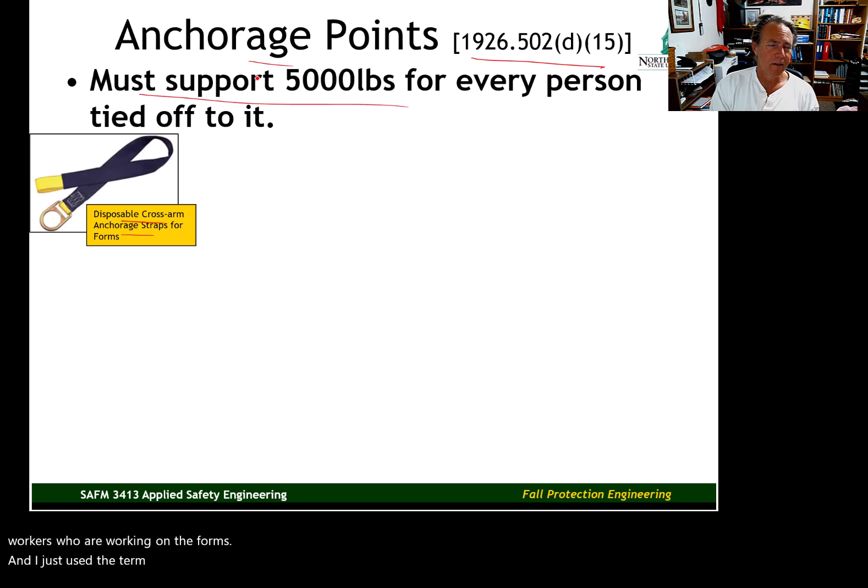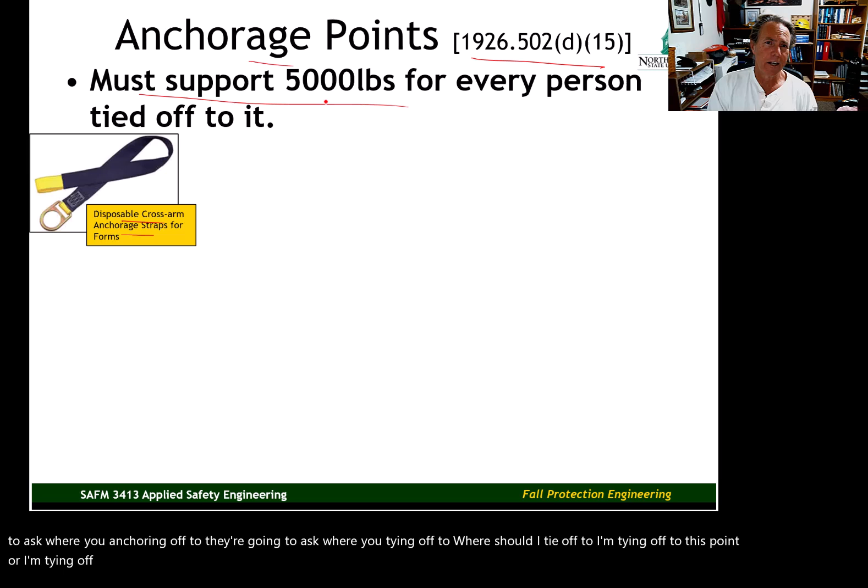You'll hear workers aren't going to say, well, I've got a great anchorage point over here. Or you're going to hear one worker ask another, they're not going to ask, where are you anchoring off to? They're going to ask, where are you tying off to? Where should I tie off to? I'm tying off to this point, or I'm tying off to that point. Anchorage points in the field are normally going to be referred to as tie-off points.

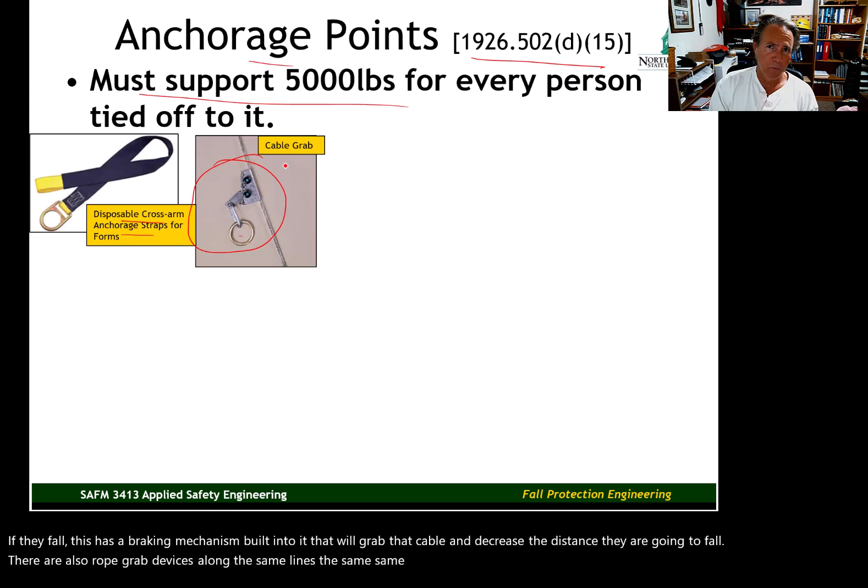This is a type of tie-off or anchorage point that is designed to be used with a device called a cable grab or a vertical lifeline. A vertical lifeline is a vertical cable that will have a device like this attached to it. The worker will attach their lanyard to this ring. If they fall, this has a braking mechanism built into it that will grab that cable and decrease the distance they are going to fall. There are also rope grab devices along the same lines, the same rationale. A rope grab, cable grab, same types of devices, just slightly different pieces of equipment, slightly different materials.

This is a permanent anchorage point that might be epoxied into a concrete surface or other structurally sound surface. Again, it has to be structurally sound. If you attach this to something that's not built correctly, it's not going to support the weight of the worker. And again, must support 5,000 pounds for every person tied off to it.

This is a cross-arm cable, not disposable. It's like the disposable cross-arm strap we have over here, but it's a cross-arm strap made out of wire rope material. You throw this over a beam. Again, the beam has to be structurally stable. If the beam's structurally stable, you throw this over that beam, choke it to that beam, and the worker's going to connect their lanyard right here.

This is a reusable concrete anchor. You drill a hole into concrete, and that hole provides a compression fitting with this device. They put this device into that hole. Once it's into the hole securely, it can't be pulled from that hole easily. It does provide the required anchorage support. Use these a lot in a lot of different construction projects. They're nice because they are reusable.

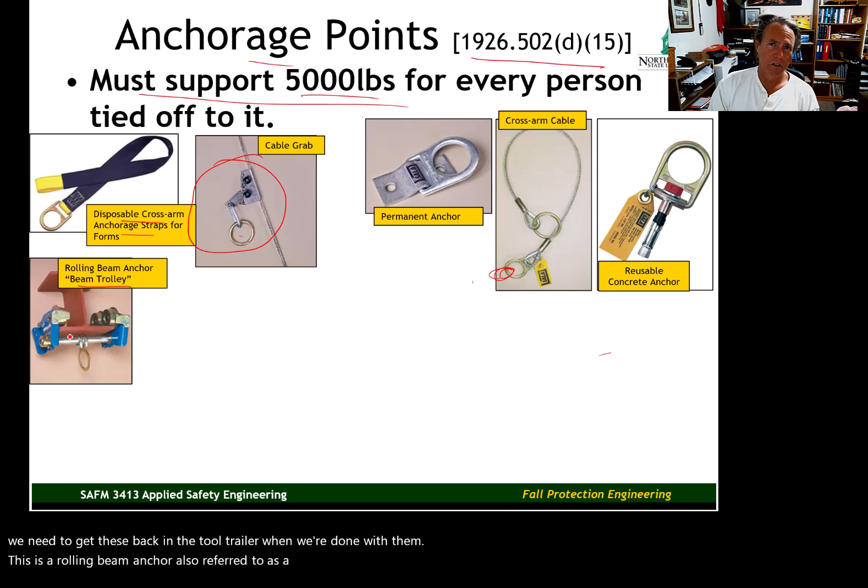This is a rolling beam anchor, also referred to as a beam trolley. You'll see a lot of these devices in ironwork. If you have a worker walking on a girder or a beam, they're walking here. Let's say this is their walking surface, and there's another beam above. The beam trolley will go on the beam above them, and the worker will connect to that ring right there. It rolls back and forth on the girder and allows pretty good range of movement for the worker.

Handy little device. Again, not cheap. I have in my collection of fall protection gear a similar device that doesn't have the rollers on it, but it functions the same way.

This is an anchorage cart device designed for one person to tie off to. Now with this, you don't have to drill any holes. You don't have to fill it with water. But when you lay down these outriggers on a flat surface, like a concrete surface, it forms a connection to that surface, and these outriggers especially keep it from sliding and moving. It's got pretty good weight to it. The weight of the device, along with these outriggers that grab onto the surface that it's sitting on, will provide anchorage for one worker. And the worker will hook their lanyard to that ring right there.

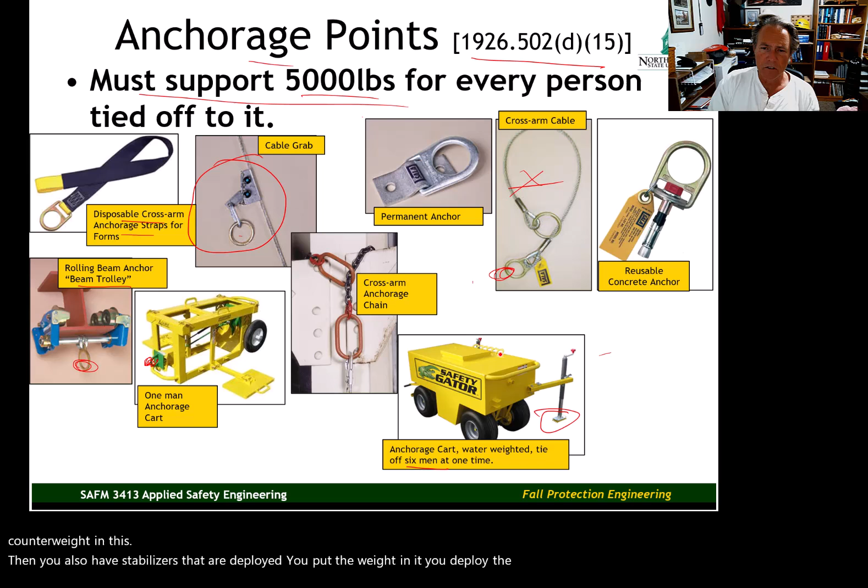Here's a cross-arm strap made with chain, similar to this cross-arm strap, same concept. Here is a 6-person anchorage cart. Now this one is different. You put water or sand, you put weight in this, you put counterweight in this. Then you also have stabilizers that are deployed. You put the weight in it, you deploy the stabilizers, and you see 1, 2, 3, 4, 5, 6 rings that workers can tie back to.

We use both of these devices a lot in bridge work, because once you pour your bridge deck, the owner doesn't want you drilling holes in the bridge deck. But you have to have something to tie off to in some instances. So we would use carts like this to provide tie-off points to the workers.

And another cross-arm strap. And this is a good picture here because it shows how the strap is choked around the beam and providing the tie-off point for the worker's lanyard. And I could do 30 minutes just talking about all the different possible devices that are out there. There's tons of devices available. And going back to my point I've made a couple of times now, there's never an excuse for not having a tie-off point, not having fall protection for your workers.

And I've mentioned this, but let me reiterate. Whatever we're using our cross-arm straps with, or let's say we're using a permanent anchor, we need to make sure that what the permanent anchor or the cross-arm strap is attached to has the structural integrity necessary to support the worker in the case of a fall.

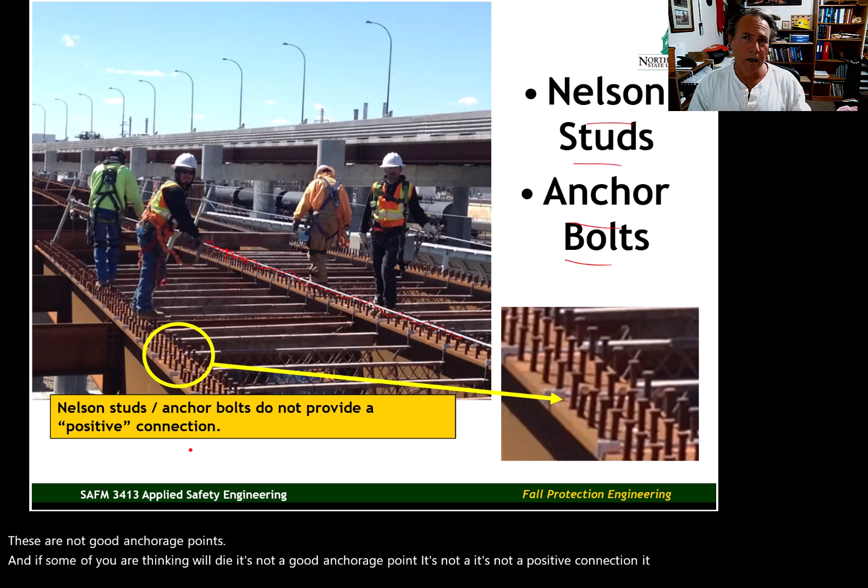These are not good anchorage points. And if some of you are thinking, well, duh, it's not a good anchorage point. It doesn't provide a positive connection. But the reason I mention this is because workers do try to use these Nelson studs as anchor points.

When I was with Manhattan Construction, it was outside of my region, out of the Oklahoma City region, but a worker tried to connect to the Nelson stud and use it as an anchorage point. Had his harness on, he had his lanyard, and he was going to use this as the anchorage point. That was fine until he fell. When he fell, the rebar hook on his lanyard popped right off the Nelson stud, and he fell 30 feet.

The upside of that whole incident, workers learned immediately that you can't use a Nelson stud as an anchorage point, as a tie-off. And the other upside, the worker survived. Even though he fell on rocks below, he walked away from that incident with only a broken arm. And there's more to that story with that worker. He did survive the fall.

If anybody wants to hear the rest of the story about that particular worker, I'd be more than happy to share it with you. But again, I do want to try to keep this particular video within 50 minutes.

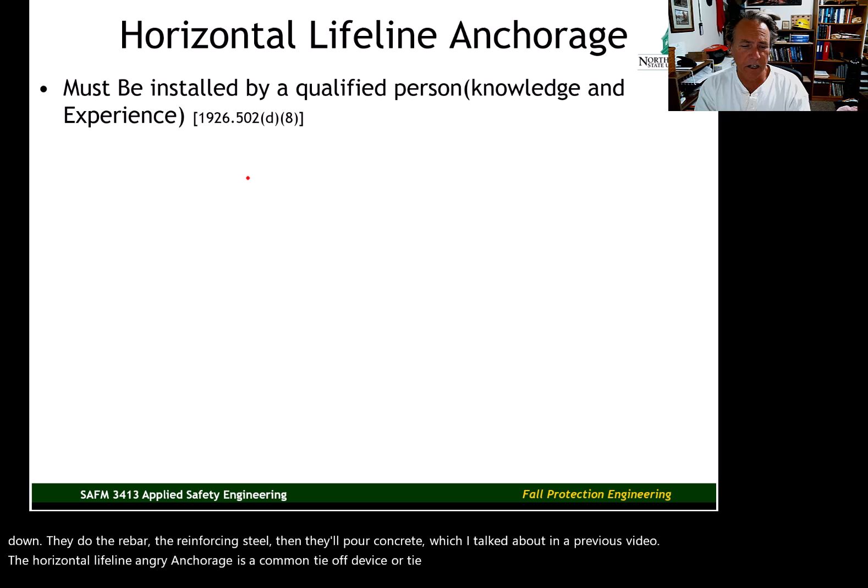The horizontal lifeline anchorage is a common tie-off device or tie-off point that you'll see in a lot of different work environments. It is exactly what it says it is. It's a horizontal line that is structurally secured at each end. It will have intermediate posts that will help maintain the proper elevation of the line. If it's set up correctly, it provides an excellent tie-off point and allows good worker movement. They're not too constrained when they're tied off to the horizontal lifeline.

But it must be installed by a qualified person who has knowledge and experience. They know what they're doing. I can't tell the new guy to go out and put up the horizontal lifeline. It has to be someone with the experience, knowledge, and skill necessary to do it right so that the anchorage is safe.

Must be installed according to design specifications. There should be a design. It shouldn't be, well, let's try this. We got all these poles, we got this cable, let's put this together. There should be plans showing how it goes together. And I'll give you an example of what we mean by plans on the next slide.

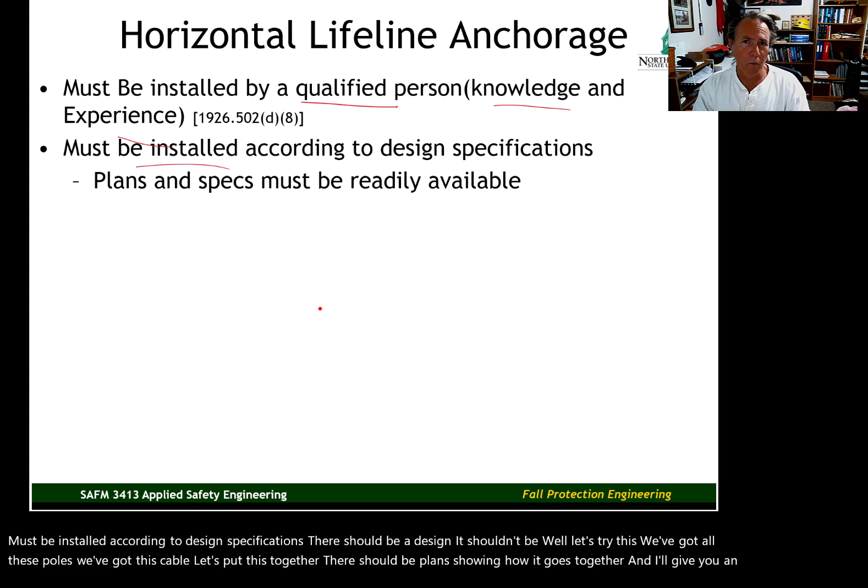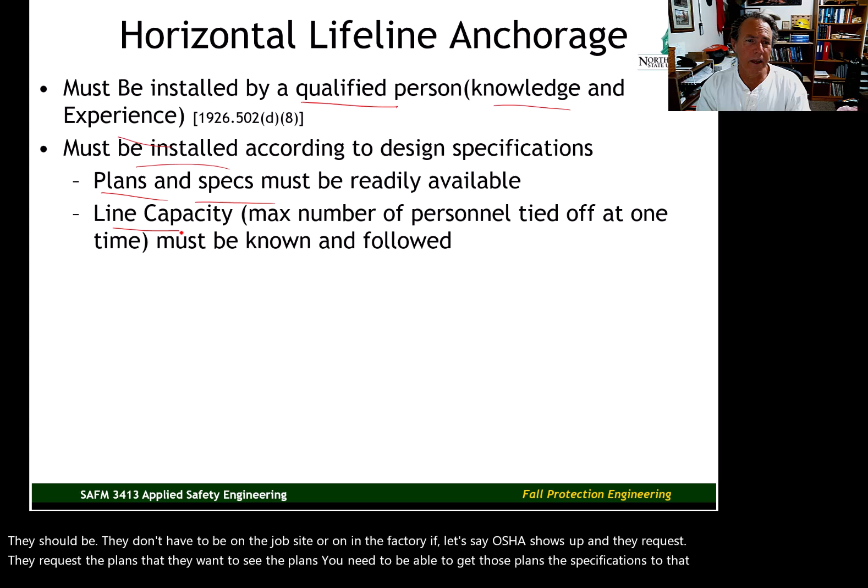The plans and specifications must be readily available. They don't have to be on the job site or in the factory. But if, let's say, OSHA shows up and they want to see the plans, you need to be able to get those plans, the specifications, to that inspector. The plan specifications must identify the line capacity, the maximum number of personnel that can be tied off to the line at one time.

Companies need to make sure that this line capacity is not exceeded. Another issue with installation of a horizontal lifeline is the amount of sag in the line. Common sense may cause us to think that the tighter the line, the better. That's not true. Your line needs to have a little bit of sag in it. That sag helps with shock absorption. If the line is as tight as possible, it doesn't provide any shock absorption.

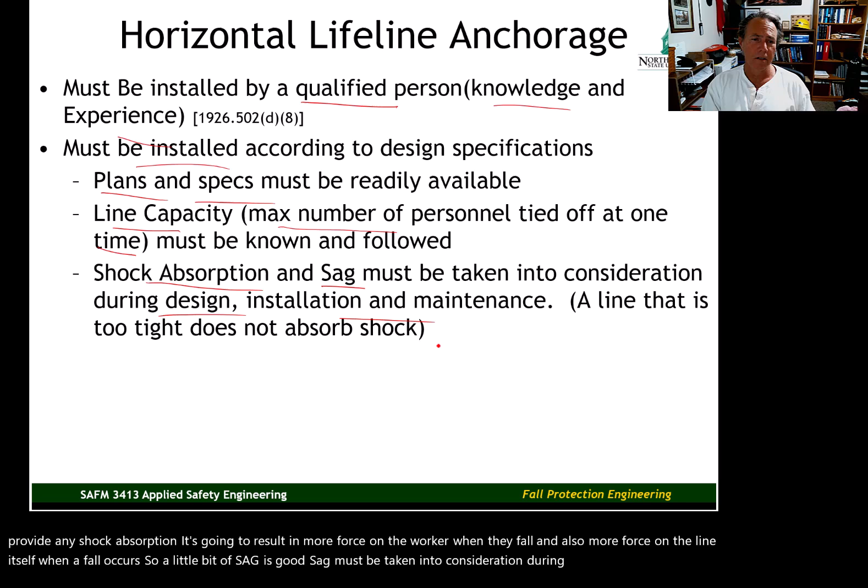It's going to result in more force on the worker when they fall, and also more force on the line itself when a fall occurs. So a little bit of sag is good. Sag must be taken into consideration during design, installation, and maintenance. If you are using wire rope clips at each end of the horizontal lifeline, you must use at least 3 wire rope clips. And I'll show you some pictures of what we mean by terminations and wire rope clips.

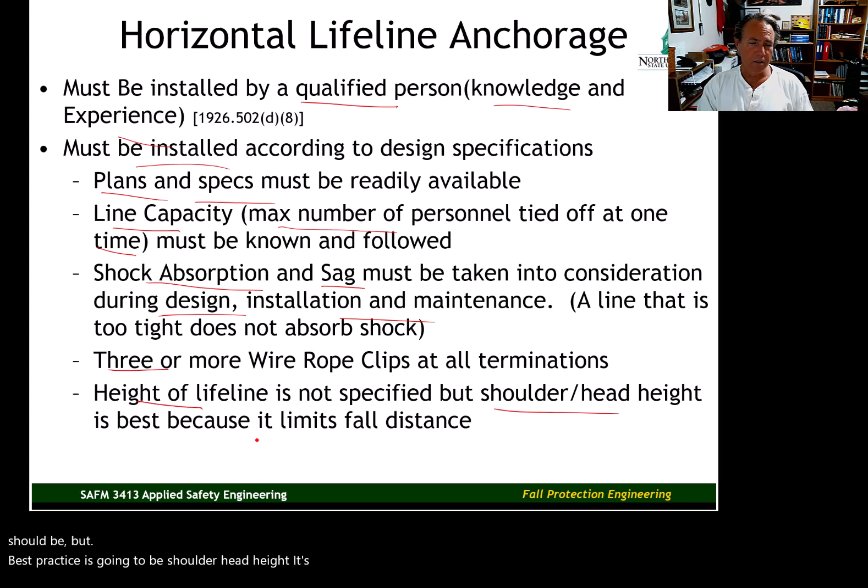We need to also consider the height of the lifeline. That's not specified anywhere in any of the ANSI requirements. It's not specified in OSHA as far as how high the line should be. But best practice is going to be shoulder or head height. It's going to limit fall distance if it's at shoulder or head height. It's also going to make it easier for workers to go from one side to the other. They're not going to have to step over it or crawl under it.

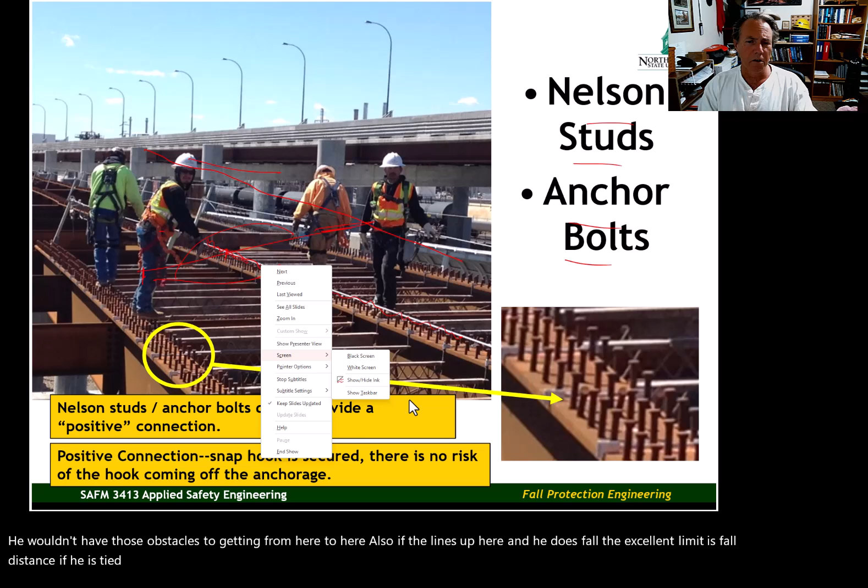Also, if the line's up here and he does fall, that's going to limit his fall distance. If he is tied off here and he falls, he's going to fall a couple of extra feet before that lifeline catches him. So height of lifeline needs to be taken into consideration. I prefer shoulder to head height, in that range. You do have to take into consideration the size of your average worker. If you put it too high, they're not going to be able to reach it.

And you do run into that with a lot of construction crews. Like I mentioned previously, construction workers typically are smaller. They're not the stereotypical big guy. They're small, wiry, hard workers, strong as an ox, but they're not big. And this is what we mean by the plans: having some written drawings, some plans for your horizontal lifeline. Now this is for a special type of horizontal lifeline that we used on pier caps at the company I worked for in the past.

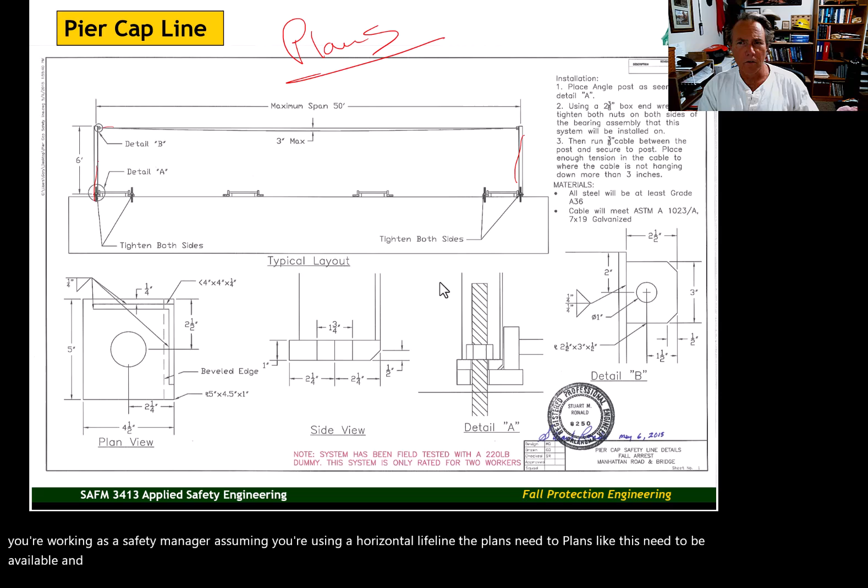And it shows the termination of the line at each end. And it shows a clear span of horizontal lifeline. And all this detail here shows how it's attached to the pier cap and so on. We don't need to go into those details, but when you're working as a safety manager, assuming you're using a horizontal lifeline, plans like this need to be available. And when the line's being installed, the plans need to be followed. And here are the installation instructions right here, all designed by our engineer.

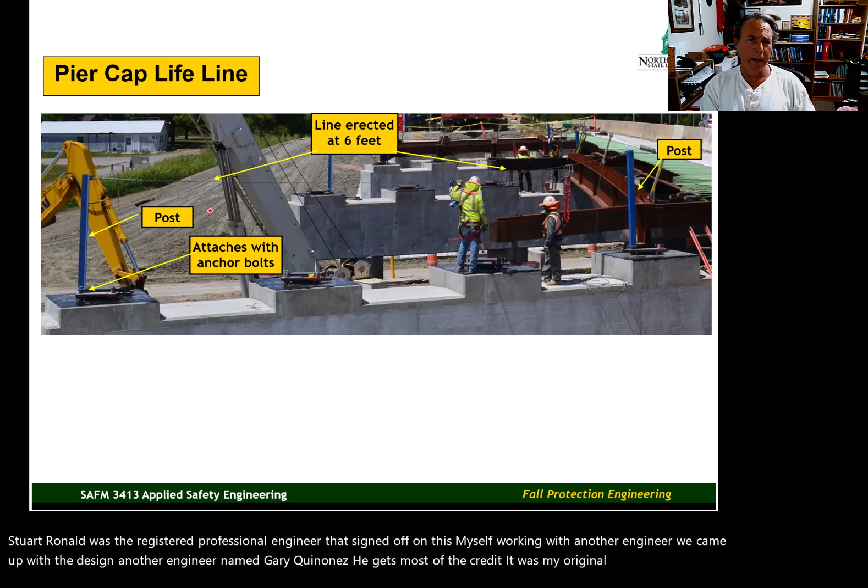Stuart Ronald was the registered professional engineer that signed off on this. Myself, working with another engineer named Gary, we came up with the design. He gets most of the credit. It was my original idea to have a line like this across the top of the pier cap. He did all the math. He did all the drawings. And then once he designed it, we tested it. We had a facility where we would test our lifelines, and it ended up being a great little system.

But you can see here, I don't remember this worker's name. Hard worker, great guy, love him to death. But he's a shorter guy, and you see how with the height of this line, his lanyards are just barely reaching up to it where he's standing. But if he falls, he's going to fall less than a foot, which is going to be good for him as far as the forces on his body. Notice he's using a twin leg lanyard. So is this gentleman here, a twin leg lanyard.

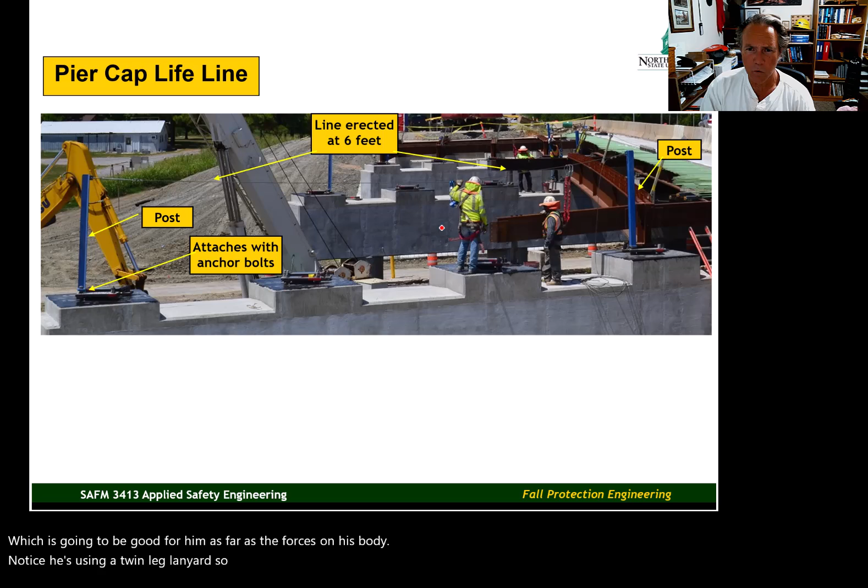Now here he's using a shock absorbing straight lanyard. This worker is using a twin leg retractable lanyard. But having the line up here reduces their fall distance. Before we developed this line, workers would tie off to a static line that was strung across the top of the pier cap. That increased their fall distance. It wasn't as good for the worker. It wasn't as safe for the worker.

Let's see, what else do I have here? Again, if you design in-house, engineers need to be involved. You need to test the system. You need to test the system according to the ANSI and OSHA protocols for testing horizontal lifelines. And the main consideration there is your test weight. You have to have a 220-pound test weight for testing these devices.

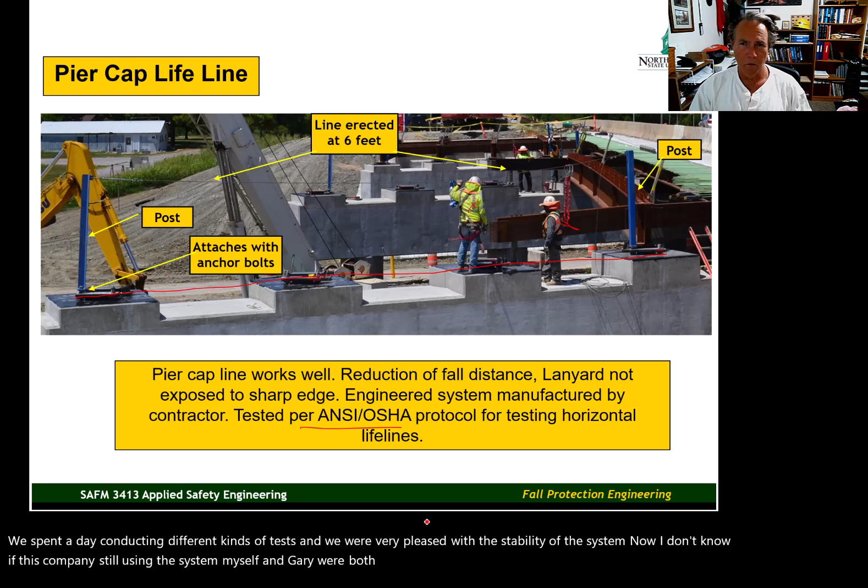And we were using load cells to determine the force generated by that 220-pound weight. We spent a day conducting different kinds of tests, and we were very pleased with the stability of the system. Now, I don't know if this company's still using the system. Myself and Gary were both gone. We were the big proponents of this. Wouldn't surprise me at all if they're not using it anymore. But it is a good system. Works, made it safer for the workers.

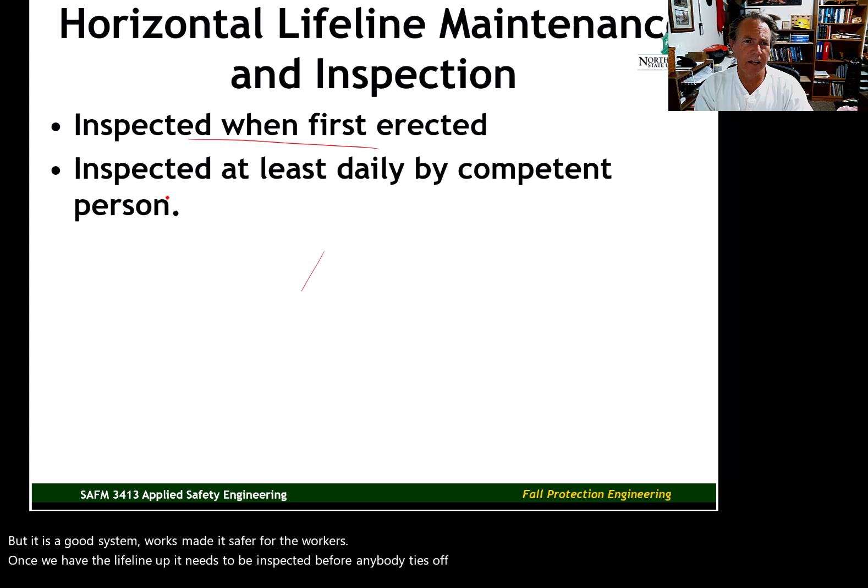Now, once we have the lifeline up, it needs to be inspected before anybody ties off to it, and then at least daily by a competent person. A competent person is a qualified person who has the authority to take corrective action. That is an OSHA term. Qualified, meaning they have the skills, the training, the knowledge to know what's safe and what's not safe, and they have the authority

to take corrective action. A competent person is a person who can say, this isn't right, everybody stop, we're going to fix it. If they don't have the authority to shut down the job, they're not a competent person. And that authority comes from the employer. The employer designates who the competent person is in different work environments.

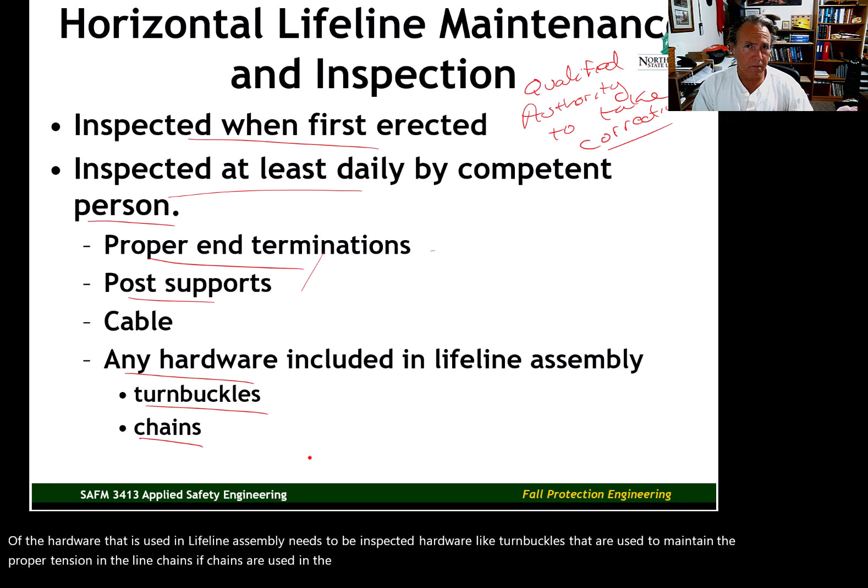Some things to look for in the inspections: proper end terminations, the post supports, the cable itself. The cable that we use, the wire rope that's used, can become frayed. It can become worn. Any of the hardware that is used in the lifeline assembly needs to be inspected. Hardware like turnbuckles that are used to maintain the proper tension in the line. Chains, if chains are used in the assembly installation of the system.

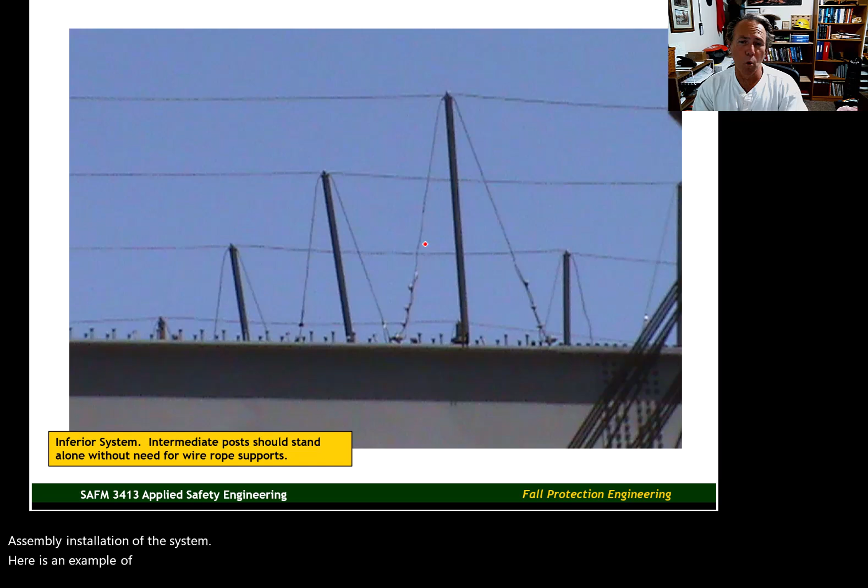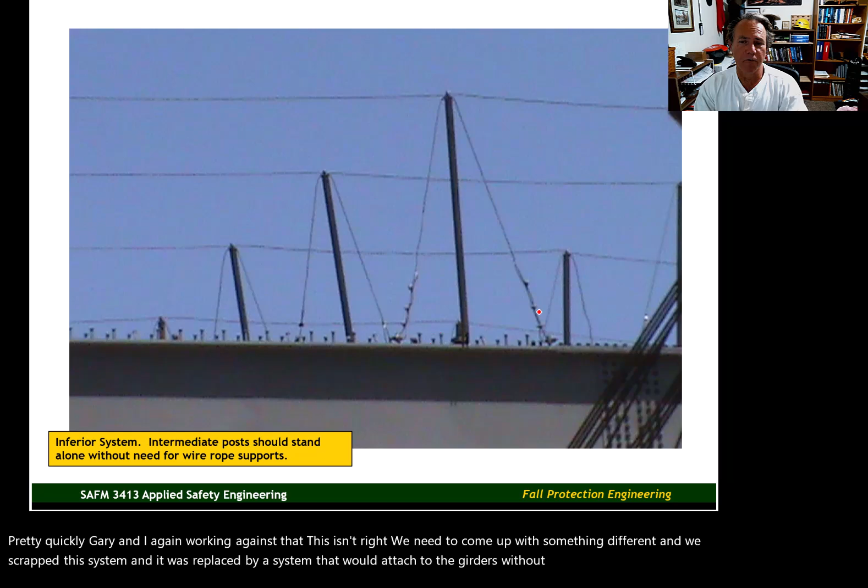Here is an example of a poor design and a poor installation. This design required support cables to hold the posts up. That's not a good design. It was scrapped pretty quickly. Gary and I, again, working together, said this isn't right. We need to come up with something different. And we scrapped this system, and it was replaced by a system that would attach to the girders without the need for the support cables.

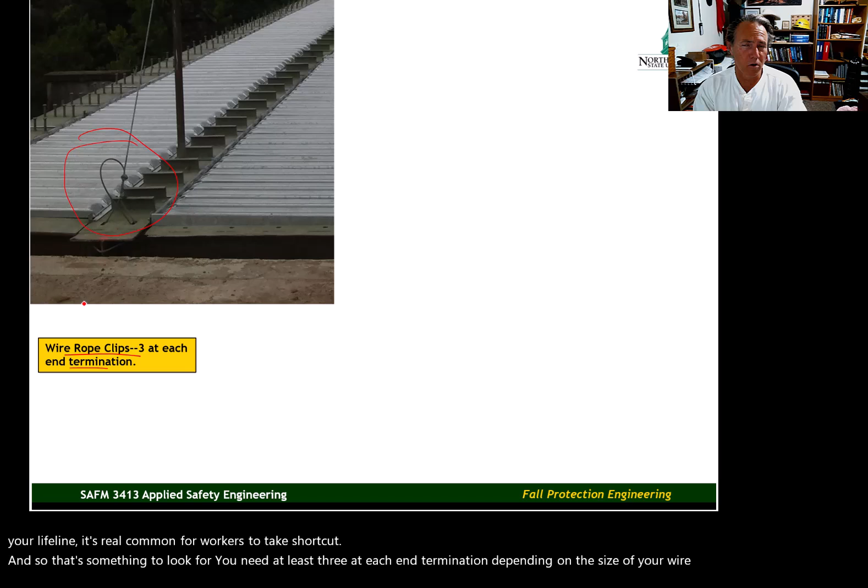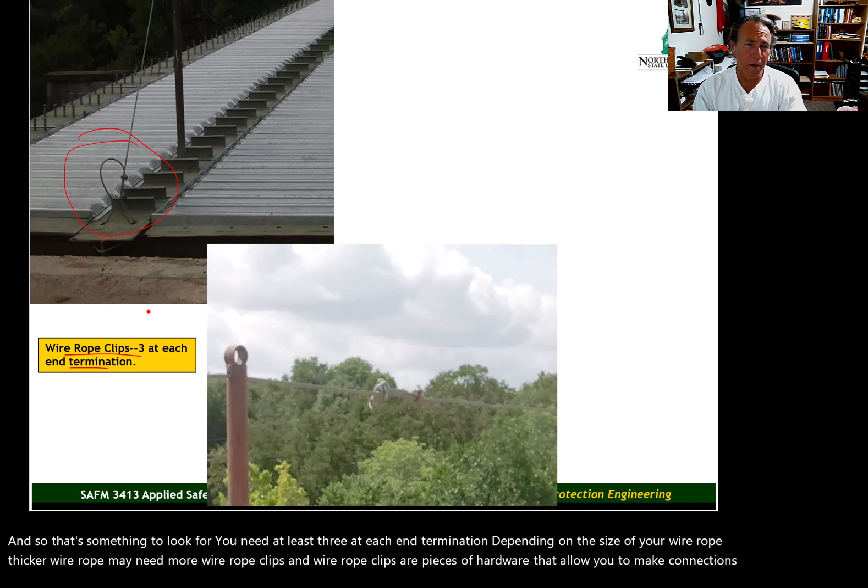Here is an end termination that only has one wire rope clip. Very common. If you're using wire rope clips to terminate your lifeline, it's real common for workers to take a shortcut. And so that's something to look for. You need at least 3 at each end termination. Depending on the size of your wire rope, thicker wire rope may need more wire rope clips. And wire rope clips are pieces of hardware that allow you to make connections between the wire rope and another structure or different sections of wire rope.

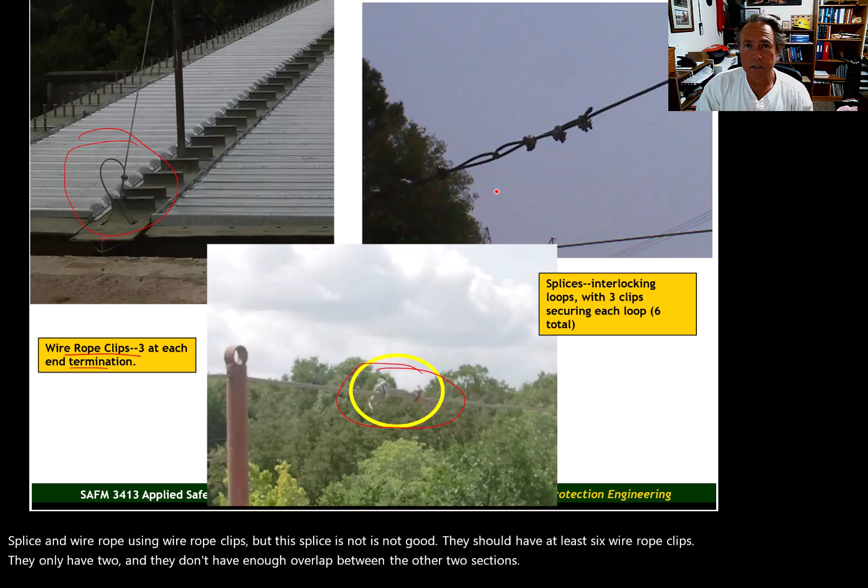Here we have a splice in wire rope using wire rope clips, but this splice is not good. They should have at least 6 wire rope clips. They only have 2. And they don't have enough overlap between the 2 sections. The better way to form a splice in wire rope is to create interlocking loops. We have an interlocking loop here with 3 wire rope clips, interlocking loop here with 3 wire rope clips. The interlock of the loops, that's much better than the splice.

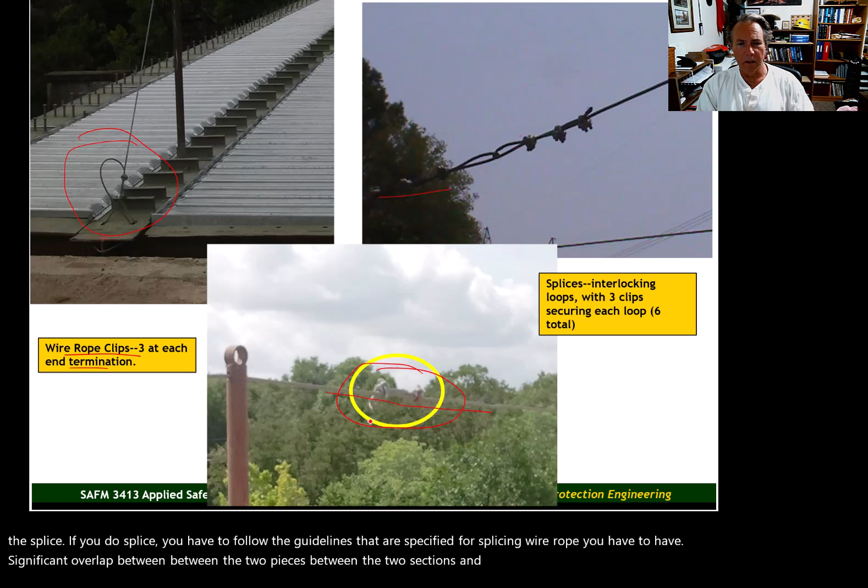If you do splice, you have to follow the guidelines that are specified for splicing wire rope. You have to have significant overlap between the 2 pieces, between the 2 sections, and you have to use the right number of wire rope clips. The minimum for an overlapping splice like this would be 6. It could be more depending on the splice itself and the characteristics of the wire rope. So pay attention to these issues if you're working around horizontal lifelines. Now, the better horizontal lifelines, they don't use wire rope clips. They'll use other hardware to make those end terminations.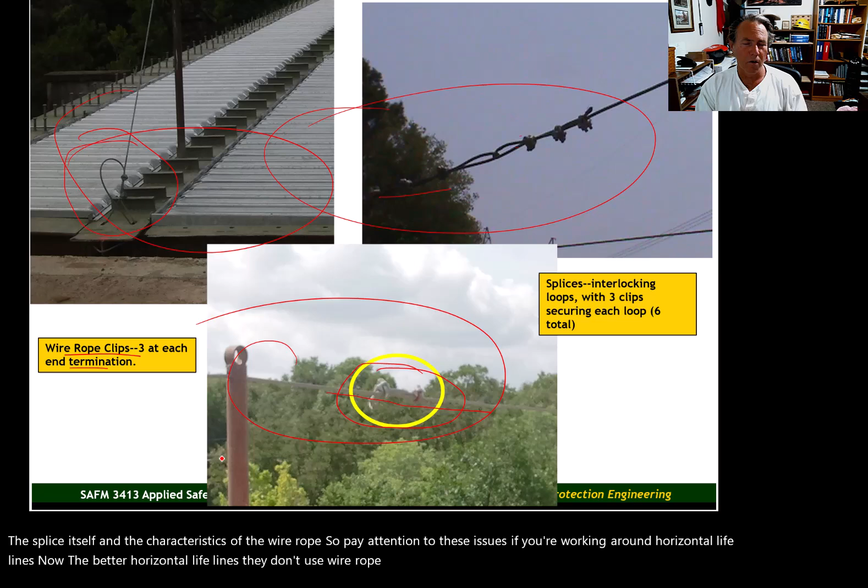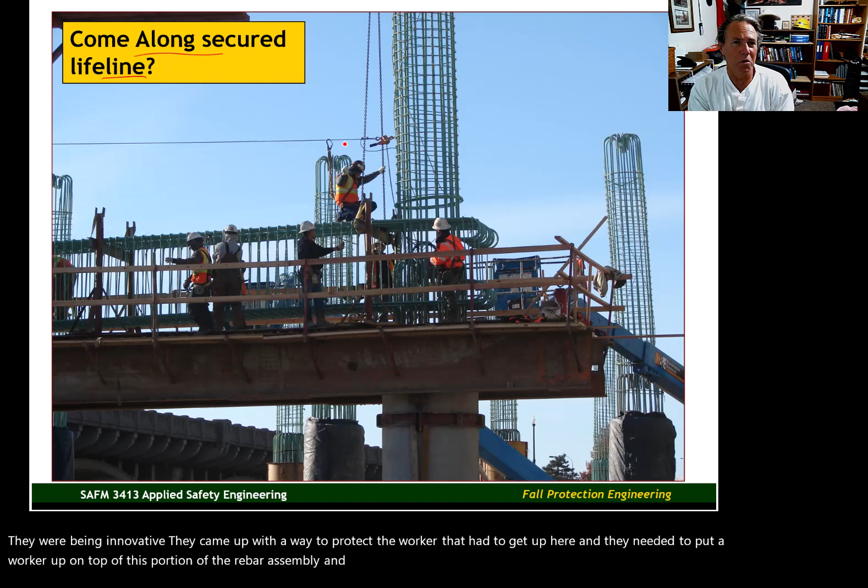They needed to put a worker up on top of this portion of the rebar assembly, and I'm sure the superintendent thought, well, Doug will be pissed off if we're not tied off. So they strung the come-along cable across from one column to another column. And again, I didn't beat them up over it, but this is not tested. This is not necessarily going to withstand the force generated by a falling worker.

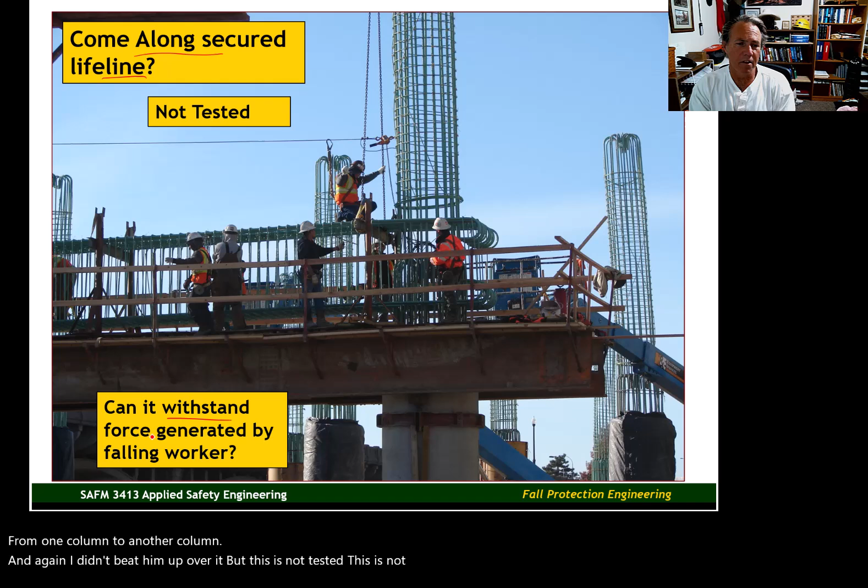It's a great idea, but we don't know the force, and we don't know how that rebar cage is going to react if this worker falls. Because the forces generated in a fall, from our calculations, can be substantial. This worker falls, the come-along could fail, or the rebar cage could fall over. There are instances every year in the United States where rebar towers like this fall over under their own weight. And if you add the additional force of a falling person, that could definitely pull one over.

So there could be a way to do this, to have a lifeline that meets OSHA standards and also protects the workers. First of all, you need an engineer involved, not just your regular safety professional, to do the calculations and make sure this is going to support the weight of a falling worker. Once you have that knowledge, then you can use a device like this that is designed for that application. It's called an EZ-Line.

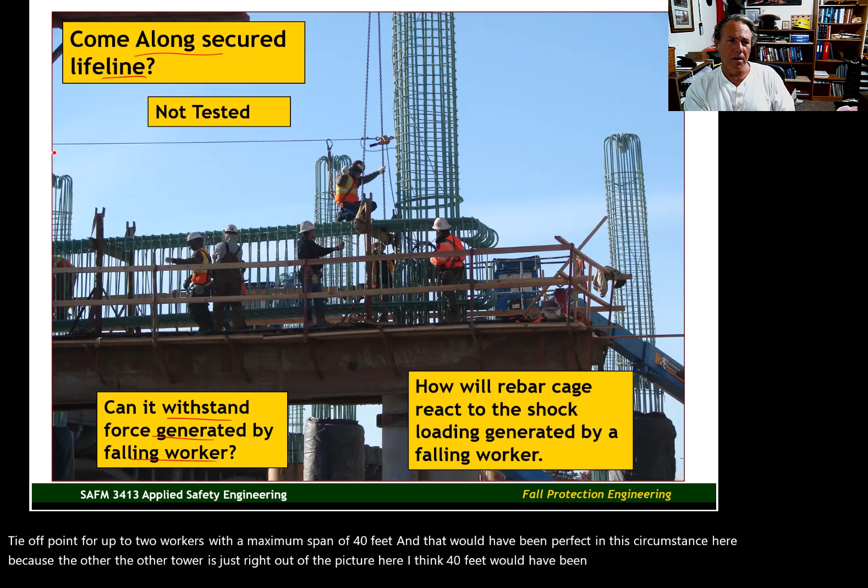You have one end attached to one structure; it's retractable. You pull out the cable, the other end of the cable attaches to another structure. It can be set up and provide a tie-off point for up to 2 workers with a maximum span of 40 feet. And that would have been perfect in this circumstance here, because the other tower is just right out of the picture here. I think 40 feet would have been plenty for the span that we're working with.

Really good device, not cheap. I keep talking about how there's all this equipment out there available. A lot of it's pretty expensive. But I say it's expensive, but in many cases it's going to be less expensive than an OSHA fine, certainly less expensive than the cost of a serious injury because somebody fell.

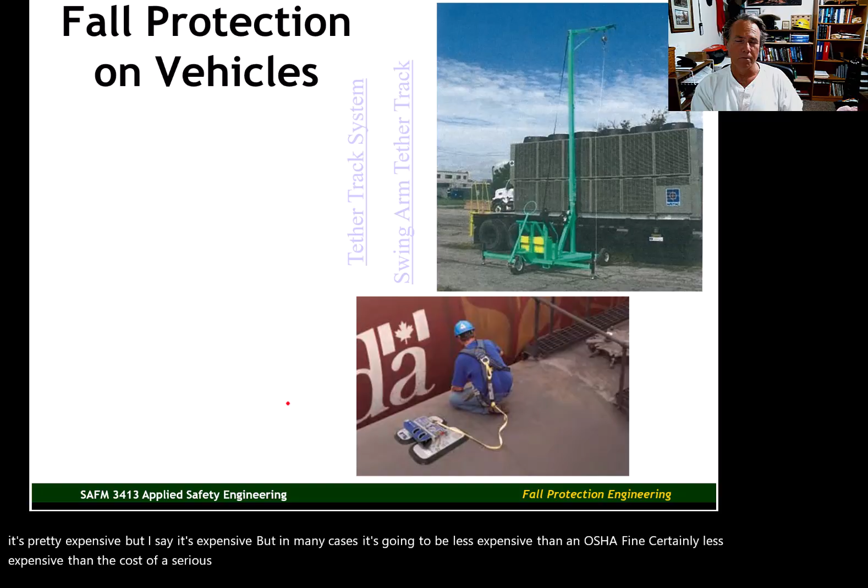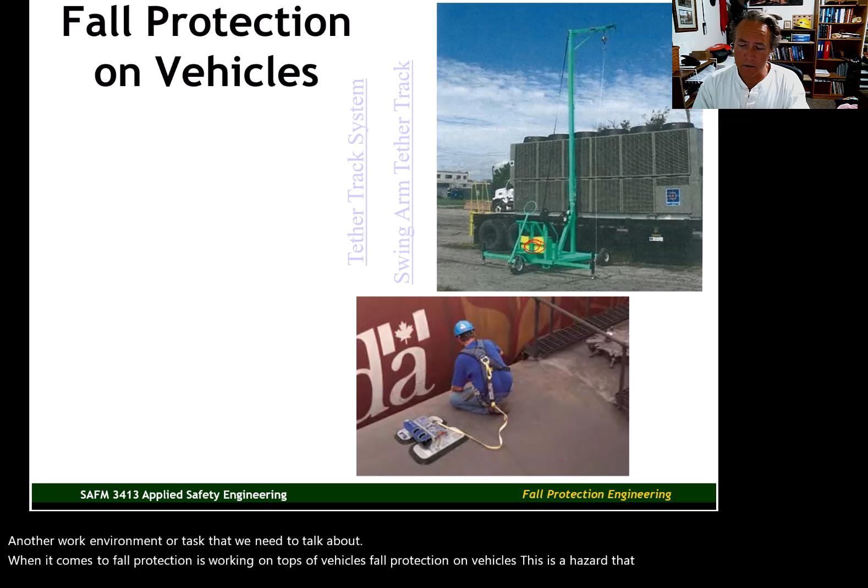Another work environment or task that we need to talk about when it comes to fall protection is working on tops of vehicles, fall protection on vehicles. This is a hazard that gets overlooked in a lot of circumstances, and it gets overlooked because OSHA does not generally cite companies for lack of fall protection when working on vehicles or equipment. But if you fall off of a crane, or a tank, or the cab of a bulldozer, that's going to hurt just as much as if you fall off a bridge, a scaffold, or a ladder. That should be our standard.

If somebody falls, are they going to get hurt? That should be what determines whether we provide fall protection or not, not whether OSHA is going to write us a citation or not. There are methods for providing fall protection on vehicles. We've got methods. People are going to be hurt if they fall, so we need to do what we can with the methods that are available.

And on the picture here are a couple of examples of methods or devices that can be used to provide fall protection on vehicles. Let's say we have this chiller unit on the back of a trailer, and a worker needs to get up on top of the chiller unit. You can use a portable overhead anchorage like we have here. It's on wheels, it rolls around, it's got outriggers and counterweights on it to stabilize it. You set it up quickly, the worker ties off on the ground using a retractable lifeline.

The cable is pulled down. You can see the cable here, it's attached right there at the corner. The worker can take the connector, attach it to their harness, and then climb up on top and have fall protection the whole way: while they're climbing up, while they're up there, and while they're coming down. These systems are not that expensive.

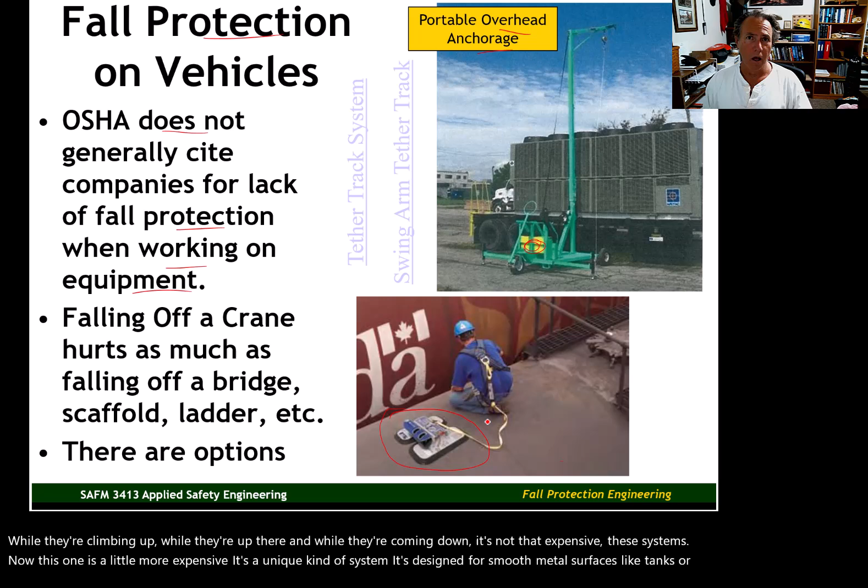Now this one is a little more expensive. It's a unique kind of system. It's designed for smooth metal surfaces like tanks or aircraft fuselages. It's a vacuum anchorage system that uses vacuum pressure to attach to whatever surface it's on. Works very well. It sucks down onto the surface of a tank or a fuselage, and it provides a secure anchorage point. The only downside, last I looked, these are about $15,000 for one unit.

Another upside of the unit, though: if you have two of them, you can string a static line between the two devices, and you can put two people on that static line. Great innovation. It was originally developed, I believe, for the aviation industry. Workers needed to get up on top of aircraft, up on the fuselage. You can't drill a hole. They needed something, and this is the innovation that was developed to meet that need.

Here is another portable anchorage device. Not a cart. With this device, the vehicle provides the stability. It parks so that a tire is on top of a part of the device itself, and the weight of the vehicle provides the stability. Once the vehicle's there, it's stable, the worker can get up on top of the vehicle and have fall protection.

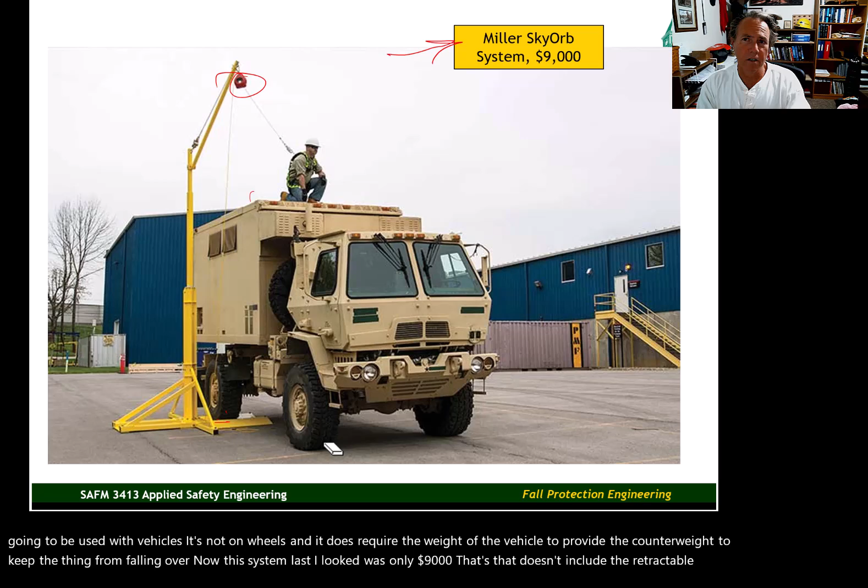Now this system, last I looked, was only $9,000. That doesn't include the retractable lanyard. That's just for the frame itself. $9,000 is less than an OSHA fine, much less than the cost of an injury. Yeah, but this is kind of an issue for me, because I've heard it over the years. Well, there's no way to provide fall protection when we're up on top of that crane, or when we're up on top of the concrete truck. Well, there is. You just gotta be willing to make the investment in money and time to provide the fall protection.

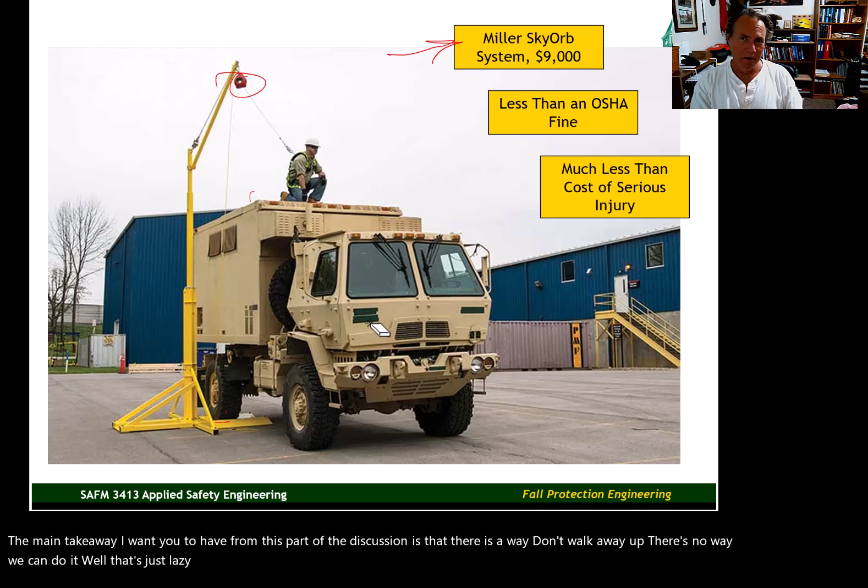The main takeaway I want you to have from this part of the discussion is that there is a way. Don't walk away saying there's no way we can do it. Well, that's just lazy. That's lazy and cheap. There is a way if there's a will when it comes to fall protection.

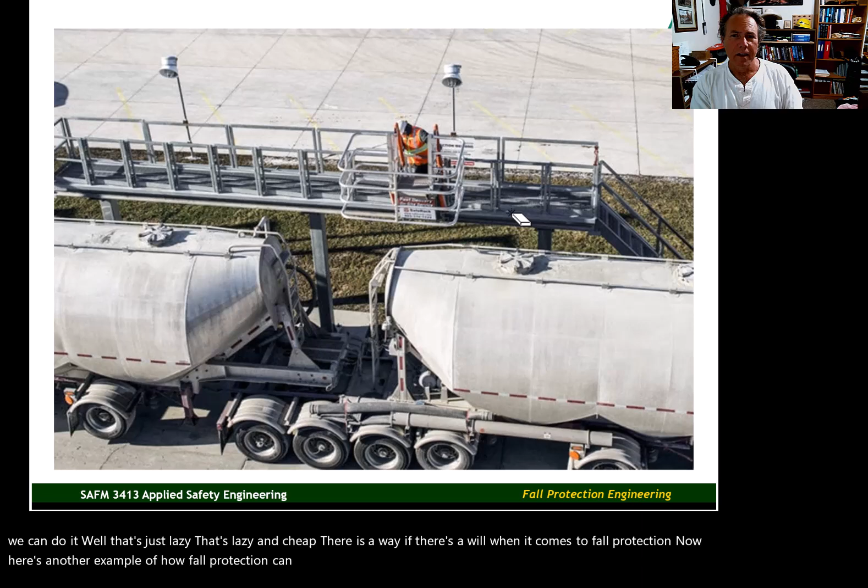Now, here's another example of how fall protection can be provided on vehicles. Now, this is a permanent drive-by work platform. You pull the truck up alongside this permanent platform, and then workers can work out of this basket and do whatever they need to do to the truck. If you're familiar with this area in the Muskogee Turnpike, there's at least one of these drive-by work platforms on the Muskogee Turnpike between Muskogee and Tulsa. And the salt and sand trucks that are used to treat the roads in the winter, they can pull up alongside this platform, and the mechanics or whoever can do whatever needs to be done to those trucks and be safe. They don't have to climb around on the outside of the truck. They can be much safer working out of the platform.

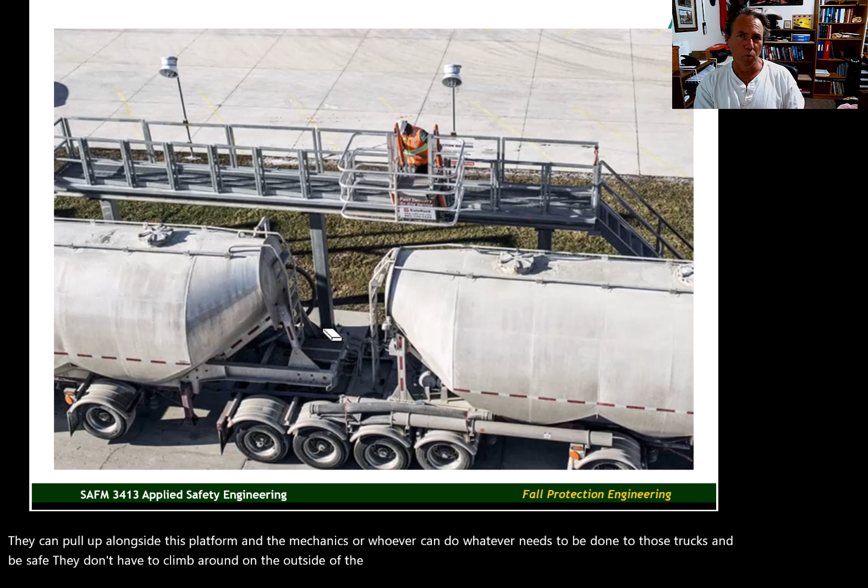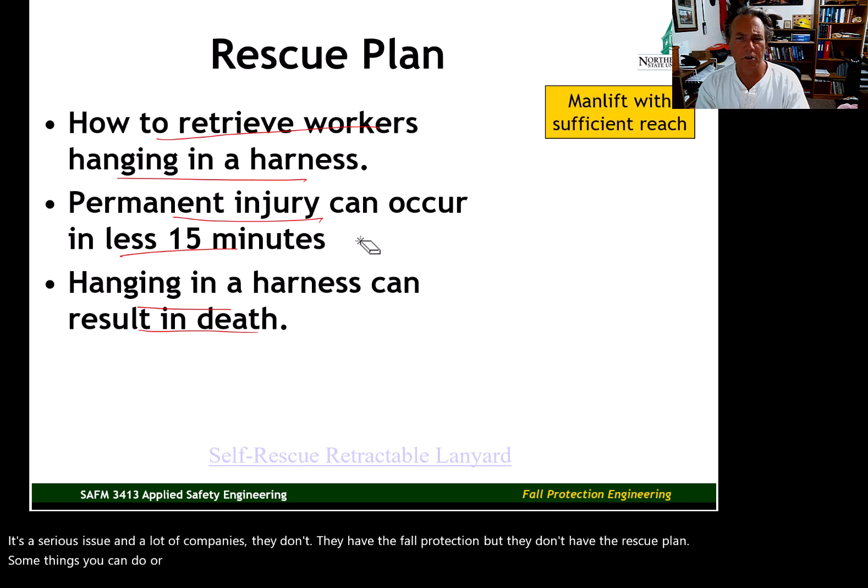All right, let's shift gears just a little bit and talk about a rescue plan for retrieving workers. And what we mean here is a plan for retrieving workers who are hanging in a harness. Permanent injury can occur in less than 15 minutes. Hanging in a harness can and has resulted in death. It's a serious issue, and a lot of companies have the fall protection, but they don't have the rescue plan. Some things you can have in your rescue plan would be a man lift. Just having a man lift on site with sufficient reach.

Using self-rescue lanyards. Self-rescue lanyards, and we will look at this video, can be purchased with lengths up to 100 feet. You can also have assisted rescues where other workers pull them up, but there needs to be a written procedure for this, and the employees need training. If you're depending in your plan on other workers to rescue the fallen worker, you can't just say, well, Joe will help Sam. Well, Joe might help Sam, but Joe might fall too. So you need to make sure that I's are dotted and T's are crossed, that there's a procedure in place, and ideally there's going to be a drill and practice that goes along with that procedure.

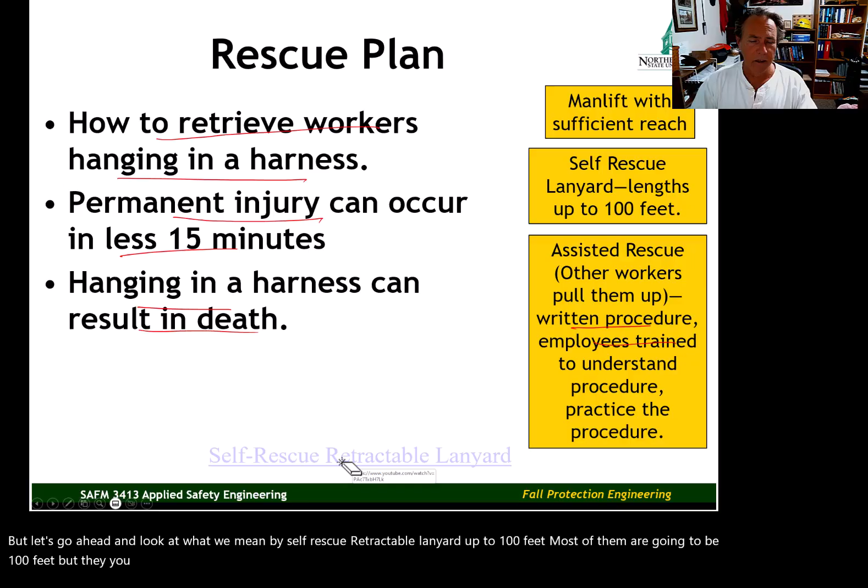They should practice the procedure before they actually have to use it. But let's go ahead and look at what we mean by a self-rescue retractable lanyard. Up to 100 feet. Most of them aren't going to be 100 feet, but you can purchase them up to that length. They're really expensive, but if you need them, you need them.

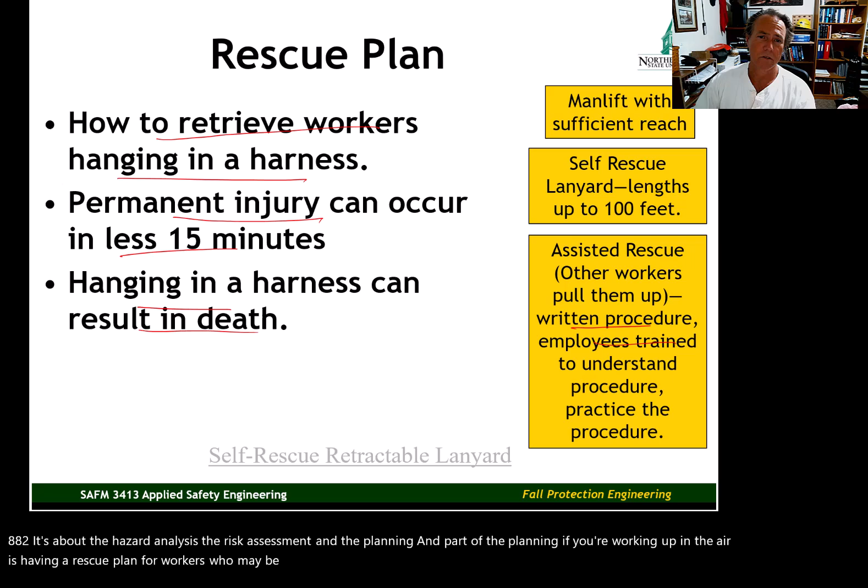We plan for safety. Going back to Military Standard 882, it's about the hazard analysis, the risk assessment, and the planning. And part of the planning, if you're working up in the air, is having a rescue plan for workers who may be hanging in a harness. If you don't have a rescue plan, we can have workers who develop suspension trauma, also referred to as orthostatic intolerance, where there can be severe damage to the body.

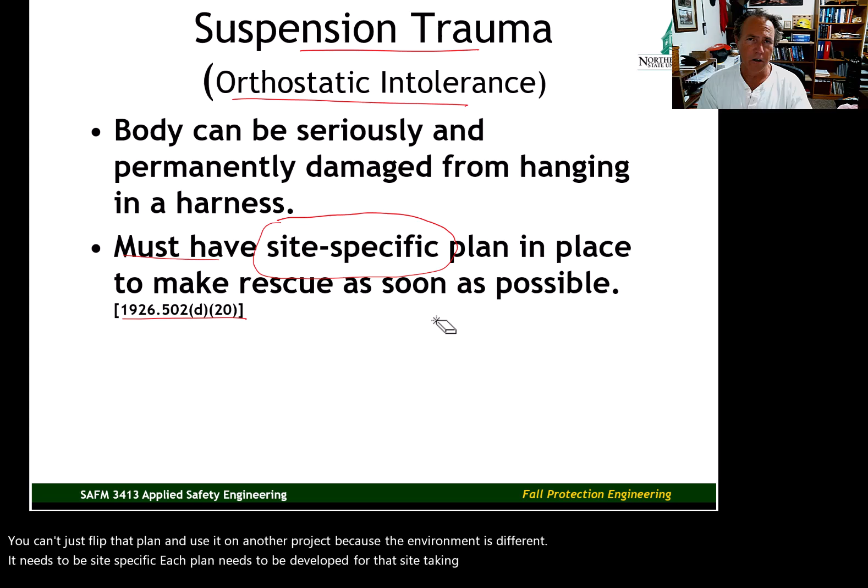And I think we've pretty much talked about this, but there's one more thing I want to show you. This was a job in South America, don't remember how many years ago. There were several workers up on top of a bridge structure. The entire structure that they were standing on collapsed. They were attached to lifelines. But when that bridge structure collapsed, it left workers hanging. And it's amazing how many workers were hanging on the one horizontal lifeline. Here they are.

Again, this structure collapsed. These workers are hanging. Got to get them down. There was one worker who wasn't tied off, evidently, and he's over here on the shoring structure, climbing his way out. And there may be others in there, but the main focus here is on that cluster of men hanging together there.

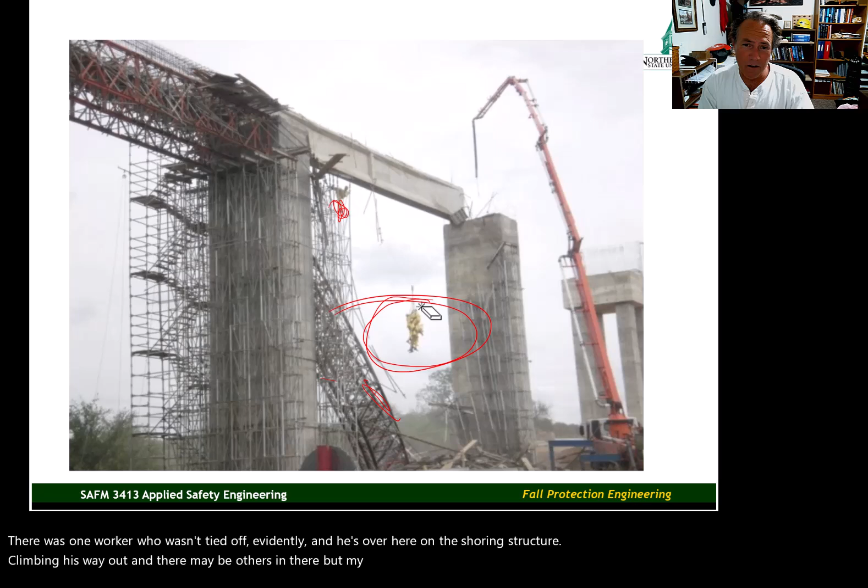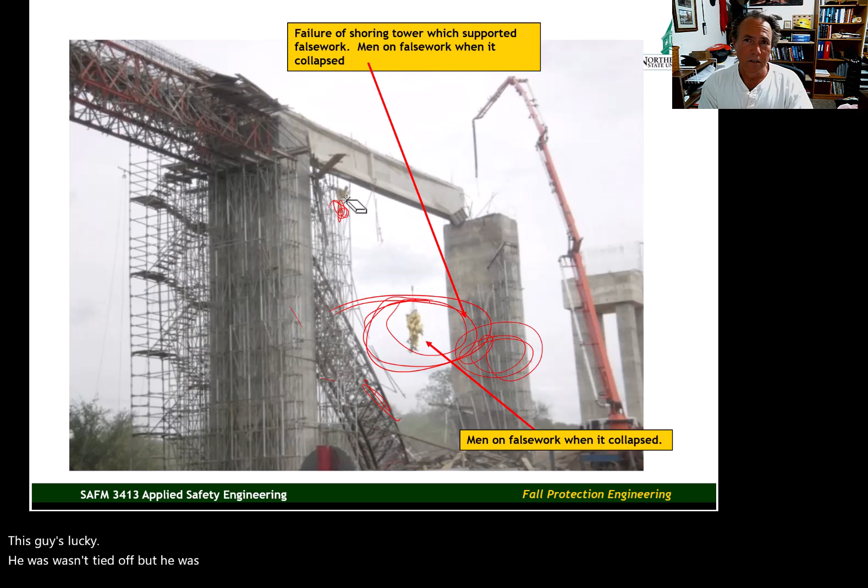Again, failure of shoring tower, which supported the false work, men on false work when it collapsed. And here's some of the collapsed shoring and false work over here. And these are the men that were standing on it. Thank goodness they were tied off. There would have been multiple fatalities. This guy's lucky. He wasn't tied off, but he was still able to escape injury or escape serious injury.

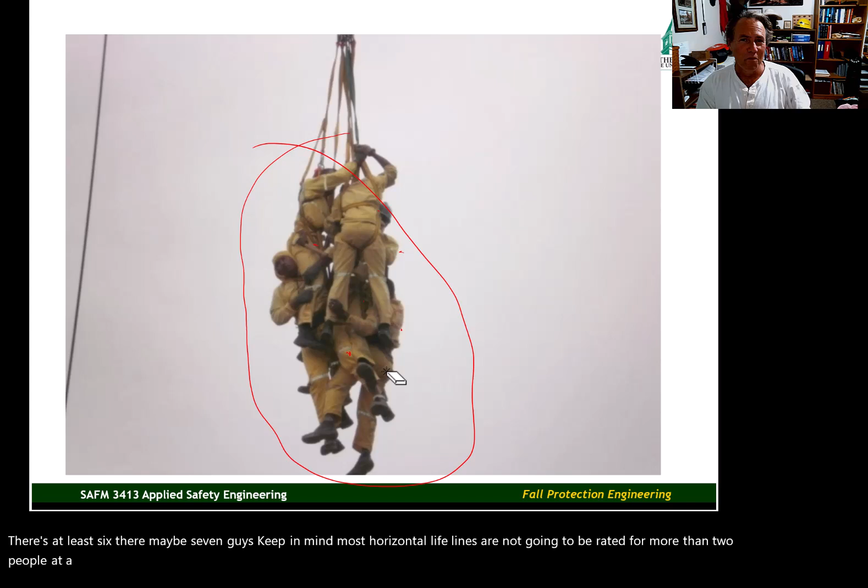But here's a close-up of what we're looking at here. Cluster of men. And they're all hanging there, and we got to get them down. We got just a few minutes to get them down. Let's see how many we got. I've counted them before. 1, 2, 3, 4, 5, 6. There's at least 6 there, maybe 7 guys. Yeah, keep in mind, most horizontal lifelines are not going to be rated for more than 2 people at a time. So that was a very well-constructed horizontal lifeline that they're hanging from.

How did they get them down, though? They didn't have a man lift on site. They did come up with a plan. They used an excavator. Thank goodness they had an excavator with a long enough boom on it that they could get that bucket up in the air and bring them down that way. Not necessarily best practice, but you got to get them down. You can't leave them hanging up there until you bring in a man lift from 2 hours away. You got to get them down.

And if I were in this circumstance and I didn't have a man lift, I'm going to use the excavator too, because the danger of them being left hanging in the air like that and what it can do to their bodies, how it can cut off their circulation and cause serious damage, even fatality. But hopefully, if I'm involved with the project, we got a plan in place, and there will be a man lift with enough reach to get up there to them. There'll definitely be a plan if I'm involved in the project.

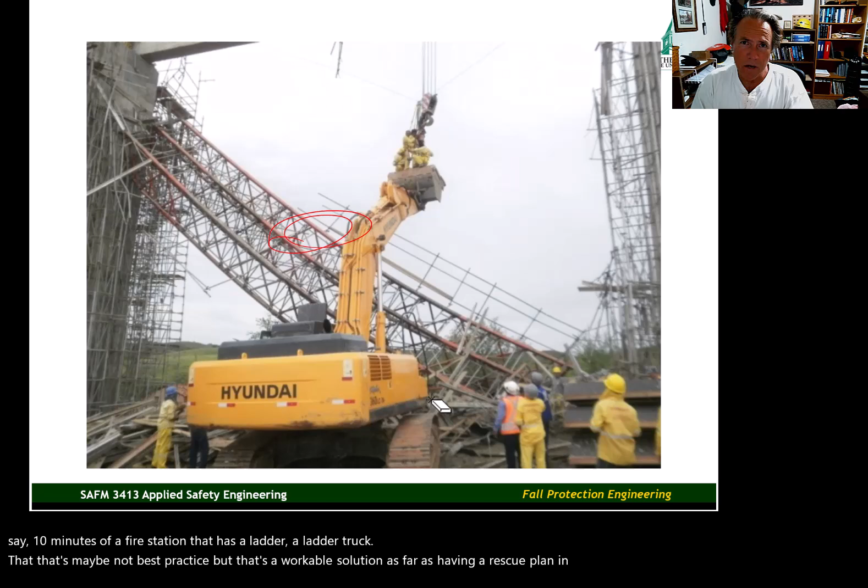And if you're involved with a project like this, make sure there's a rescue plan in place. Oh, and in some instances, the rescue plan might be as simple as calling the fire department. If your project is within, let's say, 10 minutes of a fire station that has a ladder truck, that's maybe not best practice, but that's a workable solution as far as having a rescue plan in place. Again, 10 minutes is kind of long to be hanging. You really want to get them down sooner if you can.

All right. We're getting close to the end. A few more things I want to talk about. Just some things for you to think about, because most of you are going to go in and work as safety managers. And you will have, as part of your responsibility, equipment management. Equipment management involves purchasing the equipment, issuing the equipment, and keeping records on the equipment.

Just a few tips. Order good equipment, with all orders managed by one person. There should only be one person in your division that is ordering all of the equipment. You shouldn't have this superintendent buying his equipment and this superintendent buying their equipment. It's more difficult to manage, and it ends up being more expensive that way. Order good equipment. One person is involved in the purchase of that equipment.

Usually when you do it this way, you can negotiate reduced prices from your supplier. If you identify a supplier, say, hey, we're going to buy our stuff from you, all of our harnesses we're going to buy from you, what kind of deal can you make us? You're going to get a better deal. All equipment should pass through a single office. There should be an ID number assigned to each harness, each lanyard, and each portable anchorage device. Each component of the system should have an ID number.

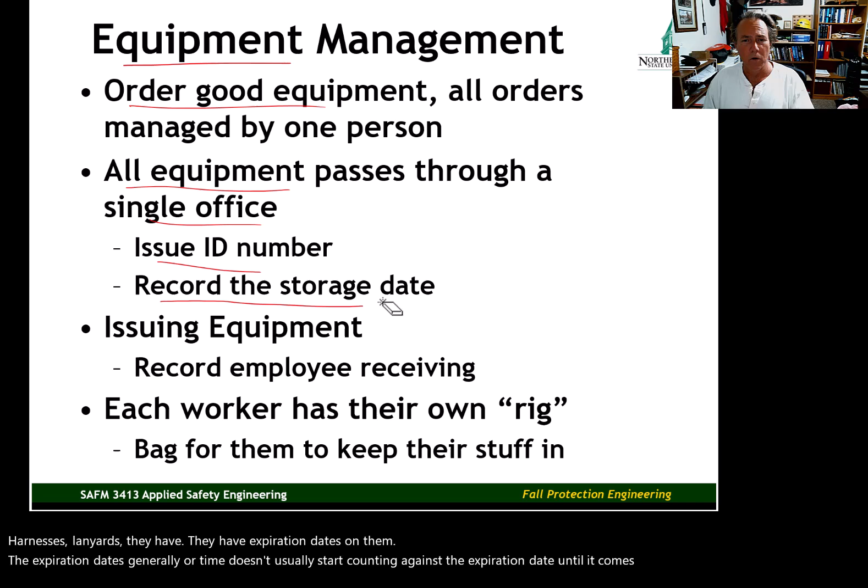There should be records of when that device went into storage. The harnesses, lanyards, they have expiration dates on them. Time doesn't usually start counting against the expiration date until it comes out of storage and goes into service. The time in storage doesn't count against the expiration date. So you want a record of the storage date and a record of when the device went into service. The equipment should be issued to employees, and there should be a record of which employee received the equipment.

Again, each worker is going to have their own equipment. You should also provide them with a bag to keep all of their equipment, all their stuff in. Keep it secure, keep it together, and protect it from the elements. There's nothing that irritates me more than to see a harness thrown in the mud. The bag or some other device you provide to them can help prevent the harnesses being in the mud or the lanyards being left out in the rain, those types of things.

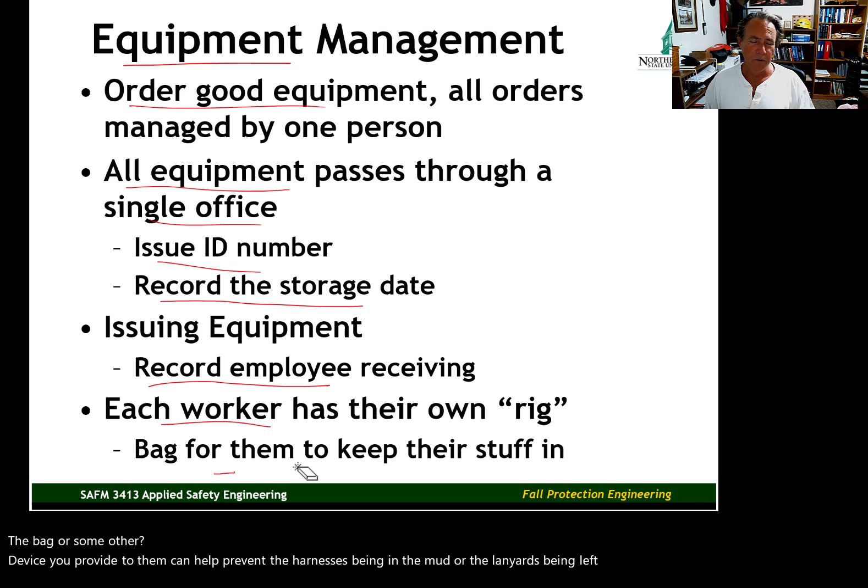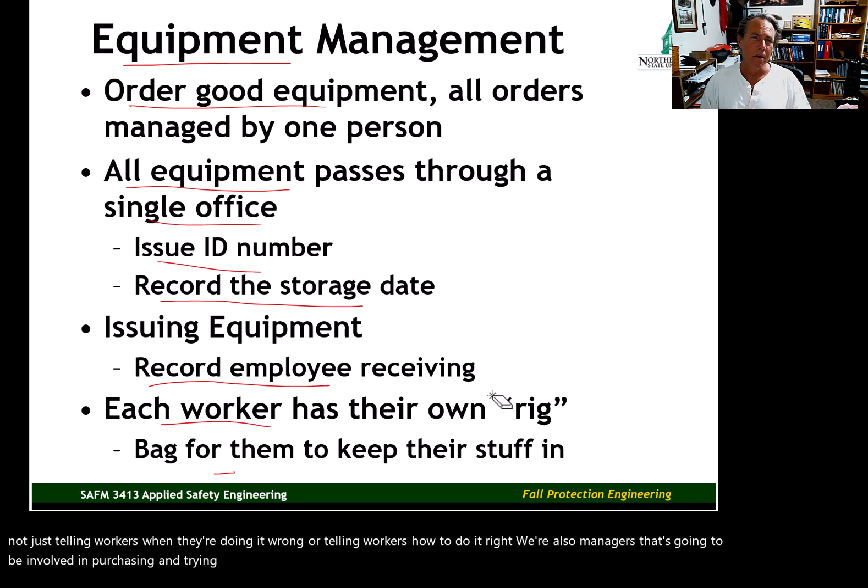Expensive equipment, we need to take care of it. Sun damage is probably just as harmful as anything else. Sun damage can shorten the life expectancy of any synthetic materials. But there's really a lot more to this, and I hope a takeaway that you'll have from the discussion of this slide is that we need to be involved in managing this. It's not just telling workers when they're doing it wrong or how to do it right. As managers we're going to be involved in purchasing and trying to save the company money with our purchasing practices and with our record-keeping practices.

The record-keeping side of it is essential also because of inspections. We have to do periodic inspections on the fall protection equipment, and we need to have inspections that are documented. Once the equipment comes into this single office, it's issued an ID number, we record the storage date, we issue it to employees, and we record the date that it was issued, and then we will have a record for that piece of equipment that we will continue to use throughout different phases of the inspection process and throughout the life cycle of that piece of equipment.

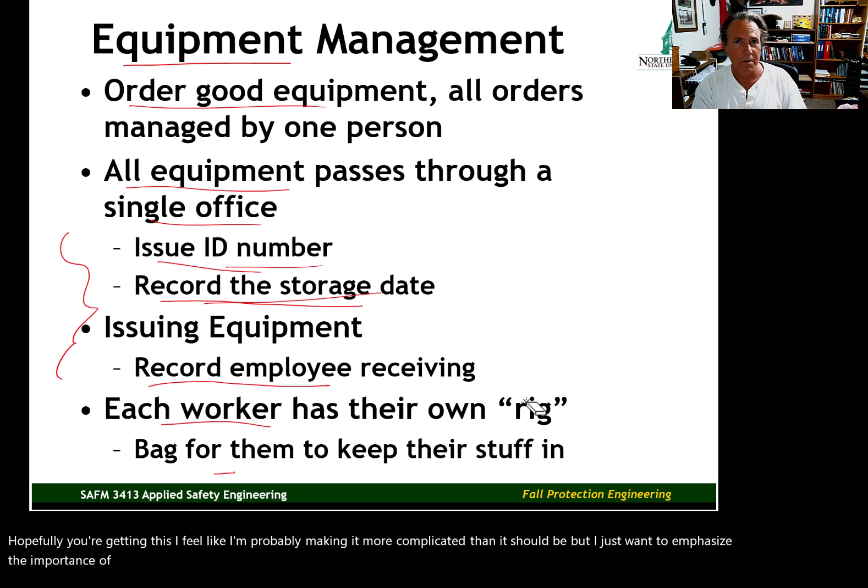Hopefully you're getting this. I feel like I'm probably making it more complicated than it should be, but I just want to emphasize the importance of this aspect of safety management. Equipment maintenance, proper storage, inspected daily. The documented inspection needs to be quarterly.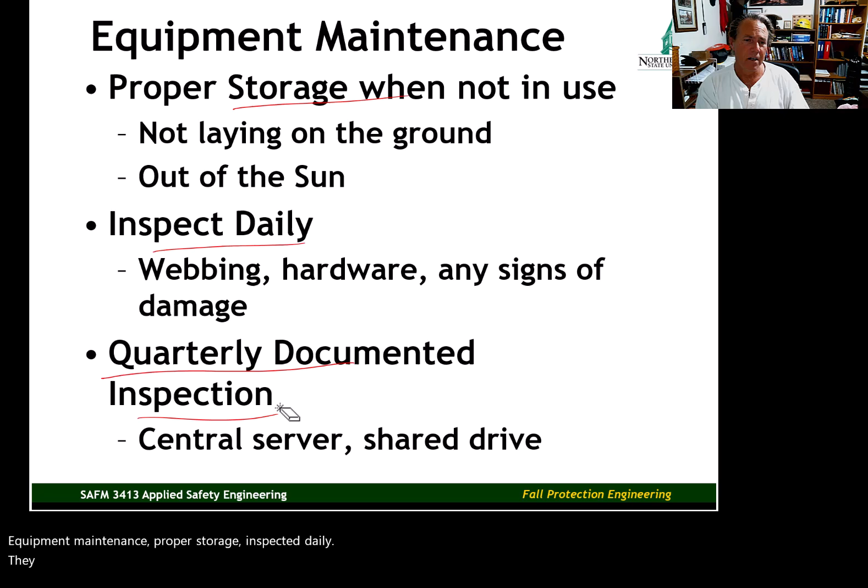Some things to look for when we inspect equipment. The webbing. Look for tears, stitches that are loose, cuts, snags, oil stains, burn marks. Any defects in the hardware, any cracks, snap hooks that don't work properly, any bent hardware. Inspect the anchor points as well. Will the anchor point that the worker is using to tie off to support the weight of an F-150 or a Chevy 1500 pickup? They're about 5,000 pounds. If something appears sketchy or appears like it could fail, don't risk it. Take it out of service.

If you see a harness or a lanyard that has what appears to be a defect in the webbing, take it out of service, get it fixed. Get them the good equipment that's going to protect them. One other thing I should mention, we haven't addressed this. If any fall protection gear is ever involved in a fall incident, it must be taken out of service. You can't continue to use it after it's been involved in a fall. The harness and the lanyard should be taken out of service, and some anchorage points. It should be sent back to the manufacturer for inspection. You send it back and say, here's what happened. Can you look at it to see if it's been damaged?

This is the 10th video, but it's a very important unit. Throughout your careers in safety management, you'll always be talking about falls, fall prevention, and fall protection. I don't care if you're in agriculture, manufacturing, construction, the entertainment industry. Falls are everywhere. And as safety professionals, a big thing on our to-do list is preventing falls or protecting workers if they do fall. So pretty much already said that. It's in every industry. Second leading killer of workers.

And these are some of our responsibilities that we're going to have in every industry. Fall hazard analysis, training, design, installation, inspection, maintenance of protective systems, purchasing fall protection equipment, motivating management to invest in fall protection equipment, motivating workers to respect the danger and use the systems that will protect them. And it's a big deal. It's not the only big deal in safety management, but it's one of the bigger deals out there.